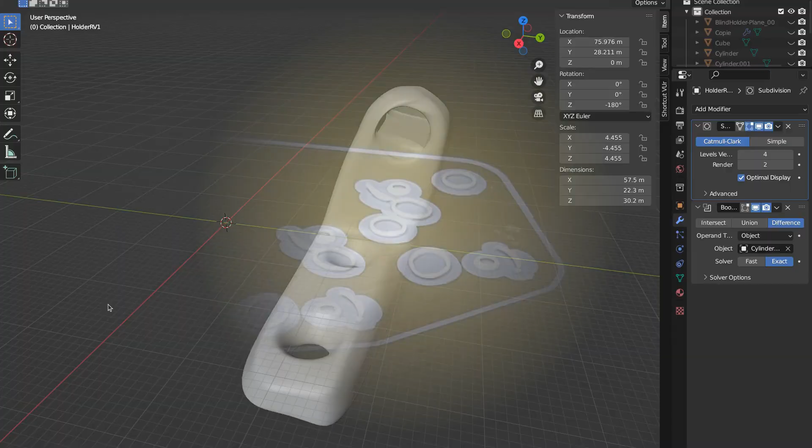Hello, this is a sun visor holder for a Porsche 911 from 1966. The holder is made of plastic, which degraded over so many years, and I was asked to make new ones. My name is Peter, and in this video, I show how I made the model and 3D printed these holders at home on a 3D printer.

The first task was to model the sun visor holder. However, the holder had a complex shape and actually no surface was flat. To obtain the shape, I decided to use photogrammetry. Specifically, I decided to use the Meshroom program. If you have never heard of photogrammetry, it is a process where by taking photos of an object from different angles, you can obtain a 3D model, a point cloud of the photographed object. I had no previous experience, so I thought I could learn something new.

I took the holder and started taking photos. The first attempts didn't work out and were actually unusable. Gradually, I realized that the original holder was too glossy, and the software struggled with reflections. Therefore, it was necessary to paint the original holder with a matte color. I used regular watercolors, which could be easily washed off if needed.

Another problem was that I was taking photos with my phone. The photos of the holder were sharp, but the background was not. So either I needed to remove the background from the photos or ensure that the background of the photos was also sufficiently sharp. It is also good to take photos with the same settings, which means using the Pro mode for most phones, where the phone doesn't change the camera settings based on different conditions.

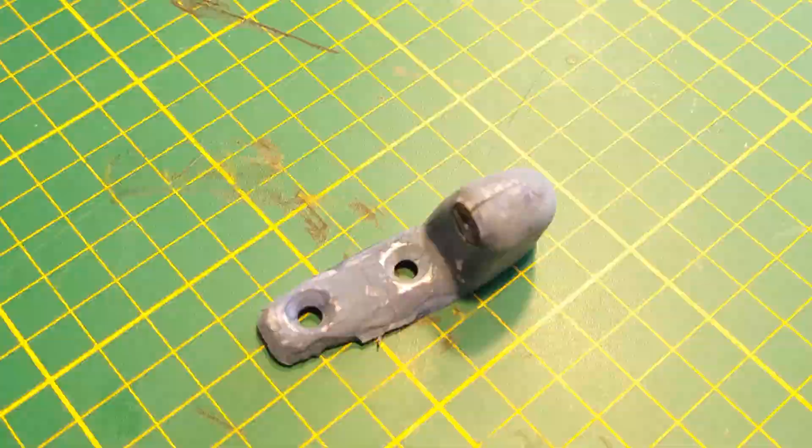Whenever I tried to photograph the holder entirely from all sides, the software deemed most of the photos unusable. Therefore, I had to take separate photos of the top and bottom parts of the holder. Then I was able to obtain an acceptable representation of both the top and bottom parts. To create the top part, I used 217 photos, and for the bottom part, I used 64 photos, out of which Meshroom rejected 13 as unsuitable. Here you can see the final mesh for both the top and bottom parts.

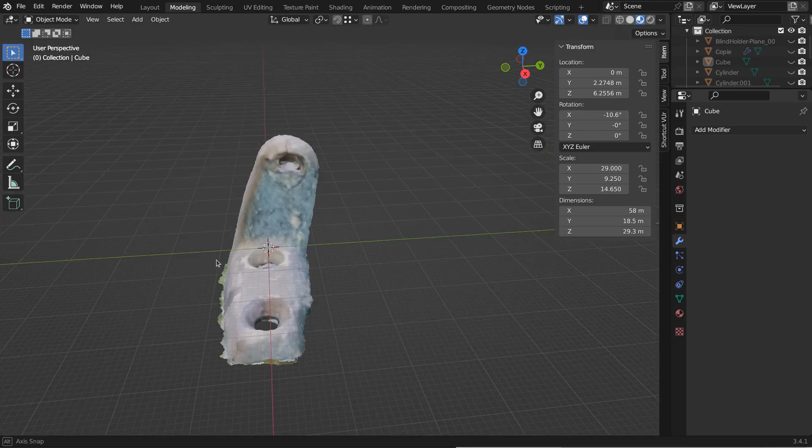After obtaining the upper and lower mesh through photogrammetry, it was necessary to put them together and edit them to create the complete model. For this purpose, I used Blender software. I merged the acquired objects and adjusted them to match the desired dimensions of the final object. However, the resulting model was still unsatisfactory for me. Firstly, the resulting mesh was not as smooth as the original, and secondly, a piece of the original holder was missing, which naturally affected the model as well.

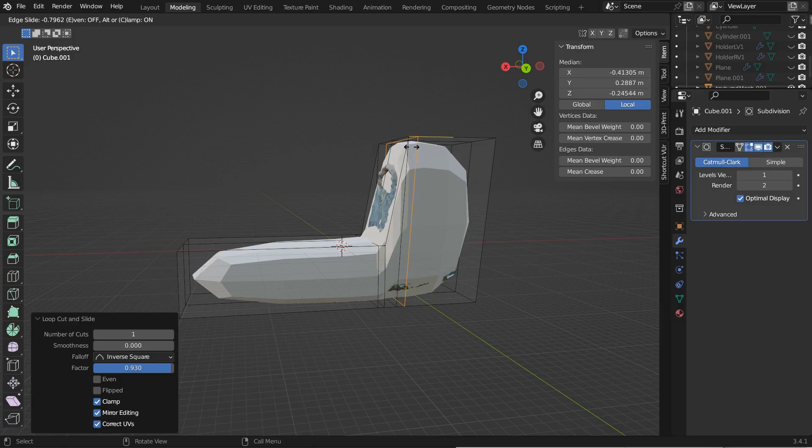So I used the obtained mesh as a reference and modeled a new holder based on the acquired template. In Blender, I started modeling the object from a cube and gradually achieved the result using the subdivision modifier. Creating the hole was then straightforward. Within a few tens of minutes, I had the holder model ready.

In this video, I won't be describing in detail the steps I took in Meshroom or Blender. Those will be covered in separate videos.

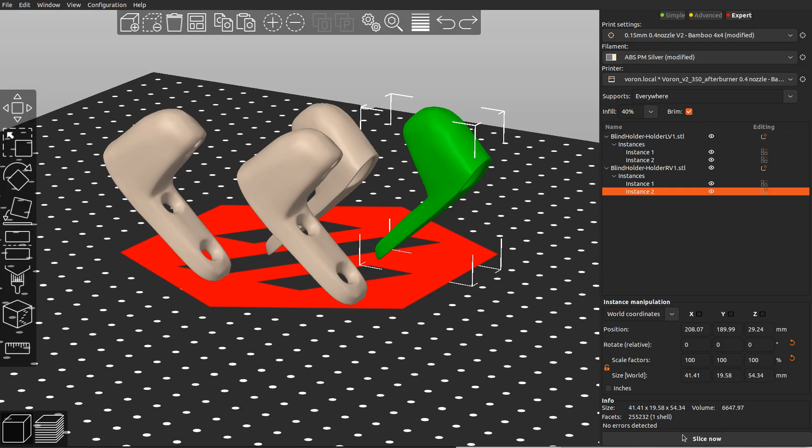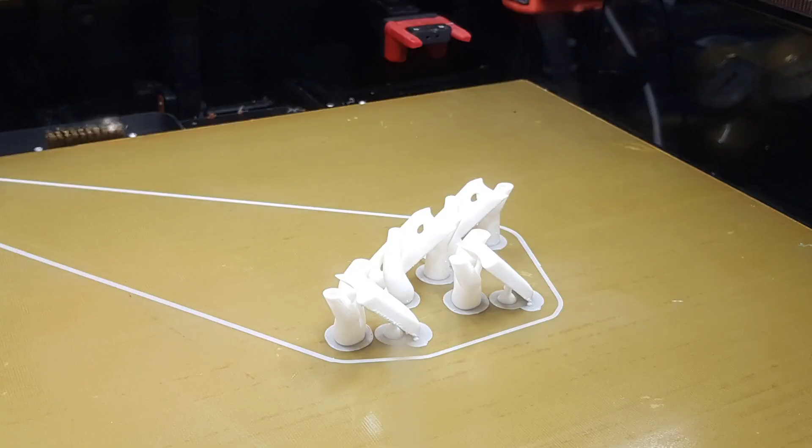Now that I have the model ready, theoretically, all that's left is to slice it in the slicer and print it. I need to print 2 right and 2 left holders, where the left ones are just mirrors of the right ones. As no surface is flat, I first positioned the holders in the slicer at a 45-degree angle. I chose a layer height of 0.15 mm and used organic supports in Prusa slicer. Printing 4 holders from ABS took about 5 hours at this setting.

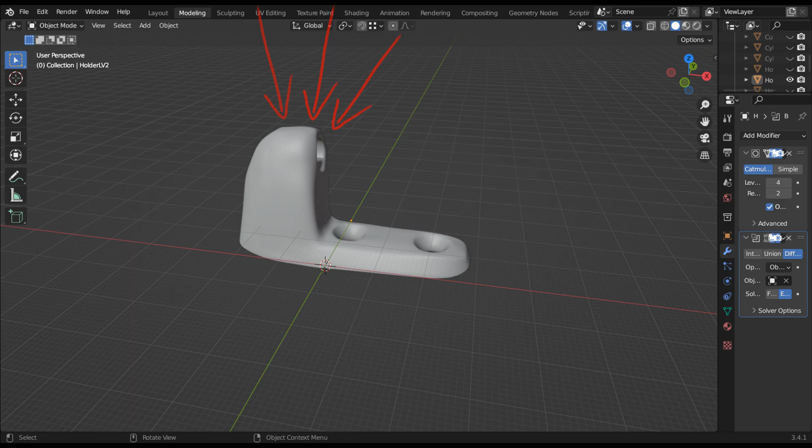After removing the supports, I conducted a strength test, and in this setting the print was not very strong, as the holders cracked at one point. It was therefore necessary to think about how the final holder would be printed to ensure that the parts were solid. I printed the holders using 3 different methods to check their strength. Subsequently, it turned out that during assembly and use, the greatest forces act in these directions, and the holder for the shade pole must be relatively strong. Therefore, I printed all 4 holders in the position that proved to be the strongest, but on the other hand, it requires using more supports.

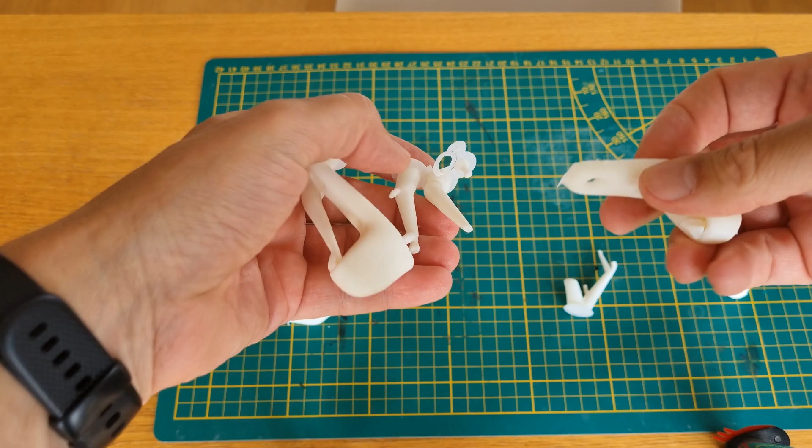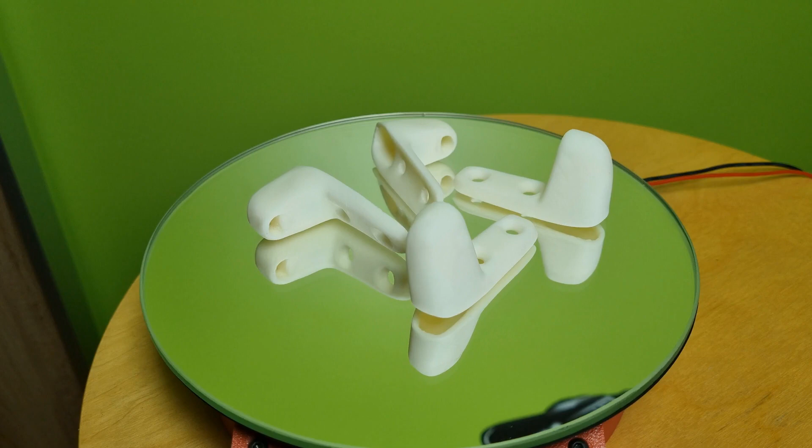After printing, all that was needed was to remove the supports and smooth the surface using a sanding sponge. Then, I sanded the entire holder with sandpaper with a grain size of 800. This way, the individual layers became indistinguishable and the surface was perfectly smooth. This was my first encounter with photogrammetry, and I will definitely use this approach in other projects as well.